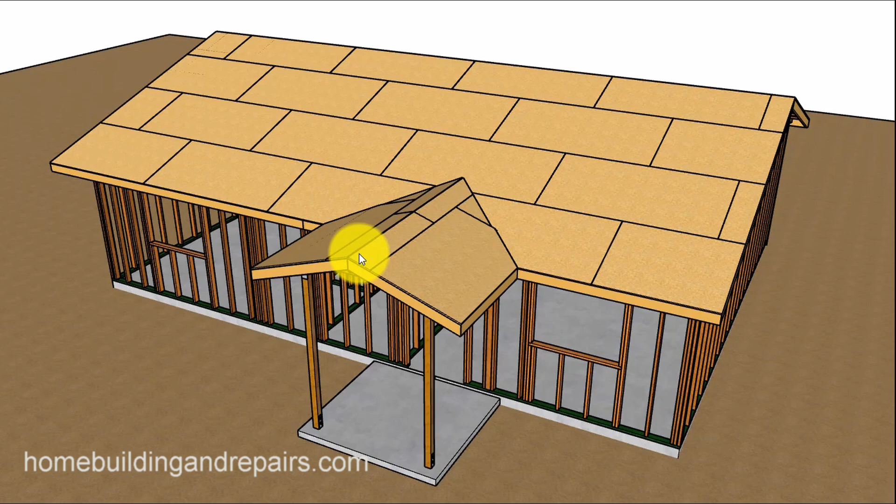Here is another video that might be helpful for anyone who's planning on building a porch extension like this and would like it to match up to the existing fascia board. And of course, that's going to depend upon how large your rafters are, where you position everything. So pay attention here if you're going to build something like this, because the rafter size is what's going to help you create the same dimensions.

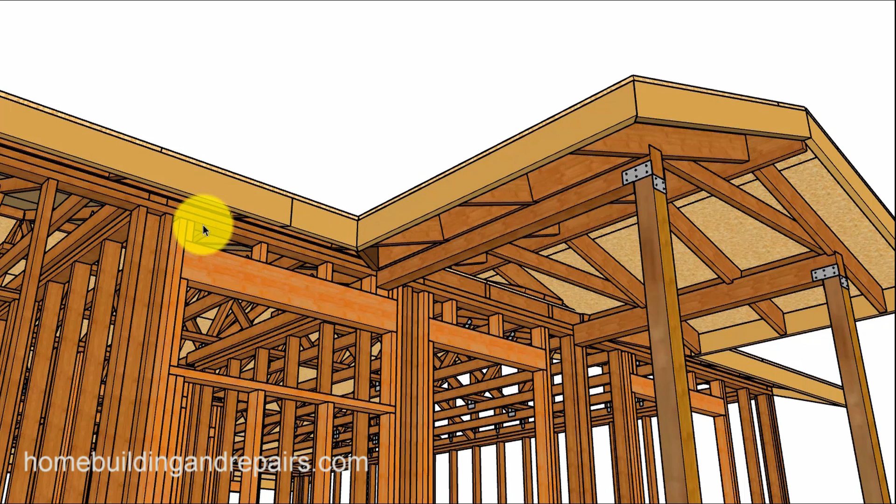For example, if you have a 2-foot overhang on the outside and you would like to have a 2-foot overhang on this side, then the rafters are going to need to be the same height. And you'll see what I'm talking about here in a few seconds. Go ahead and take the sheathing off, roof rafters.

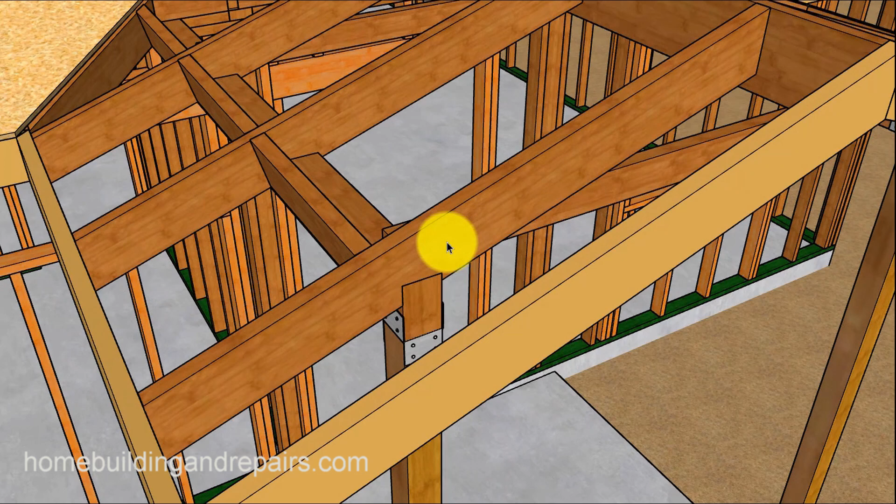So here we go. Here's the key here. The measurement right here from the outside corner of the beam straight up. Let's just say it's 4.5 inches. It needs to be exactly the same as what the outside of the roof rafters are measuring. And in our case here, we have a truss roof. So the measurement from here to here needs to be the same.

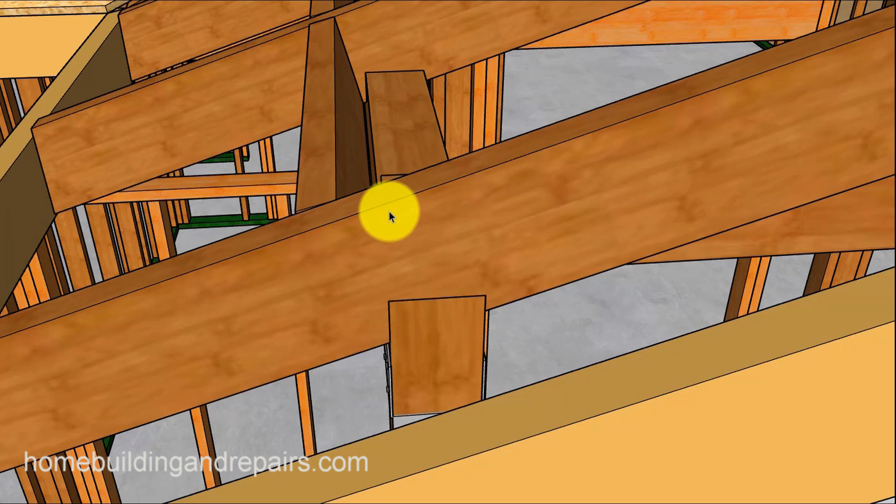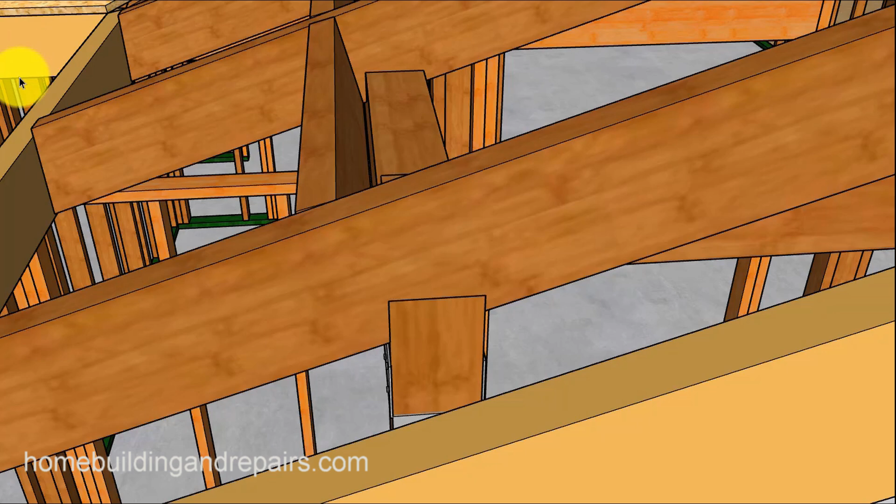Let's just go back to it. As here we are on the outside, as from here to here, to match the fascia board. Now, if this is a little higher or a little lower, then your overhang is going to be a little smaller or a little longer. So if the existing house has a 2-foot overhang and you want to keep it the same, then this measurement right here is going to be critical, going to have to be the same. It can be off a little bit, maybe even 1/8 of an inch, but other than that, it can start to push the fascia board out or in, depending upon how far off you are.

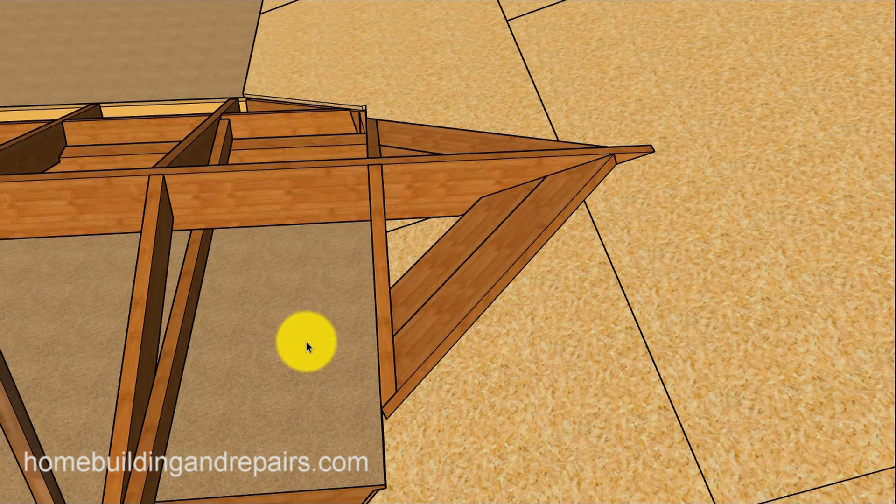Now, here's something else I want to point out. The other porch that I drew, when you finish the wall, it could be finished a little different. This one here, I went ahead and removed the overhang, and this comes underneath. And we need to have some type of a wall that's even with the lower wall here, and these roof rafters will provide us with that, as long as we line up the face or the edge of the rafter with the wall framing, because we might want to finish the top.

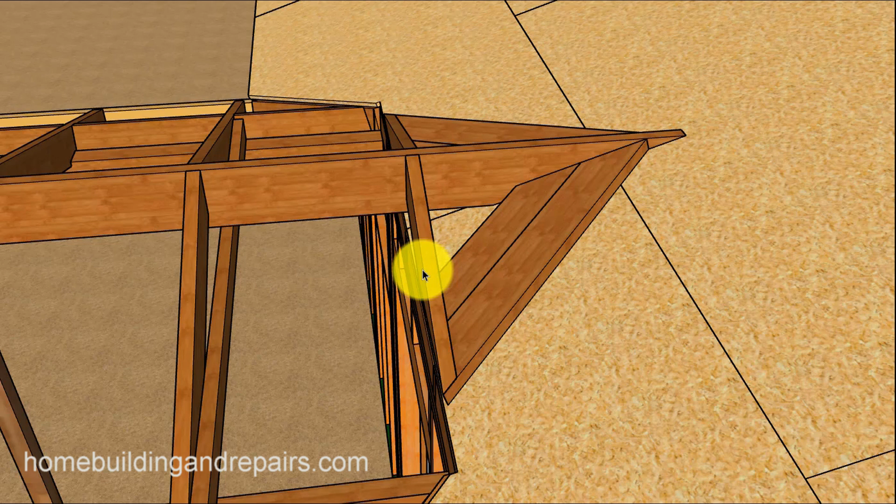It depends. If you're going to put a ceiling on, this isn't going to be important. If you're going to paint the bottom of the roof rafters, maybe you're going to use plywood for your sheathing, maybe some 1x6 shiplap or T&G, something like that, and you need to finish the edge, then it's going to have to be framed like this.

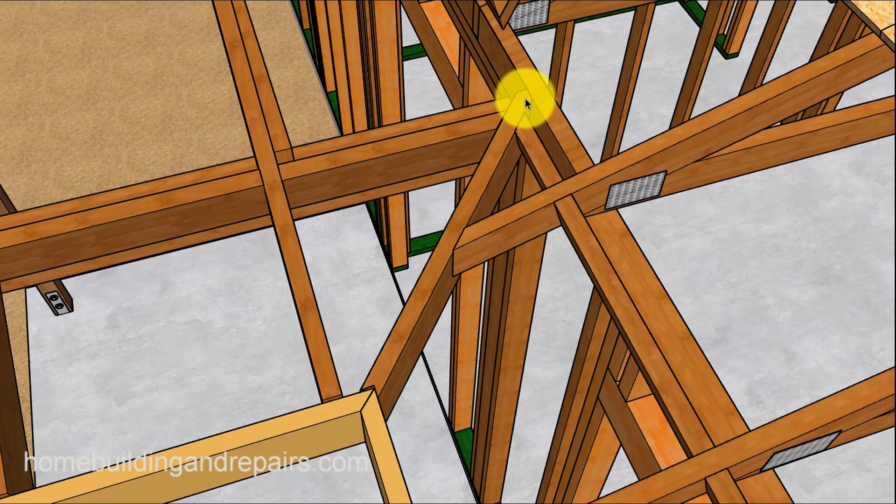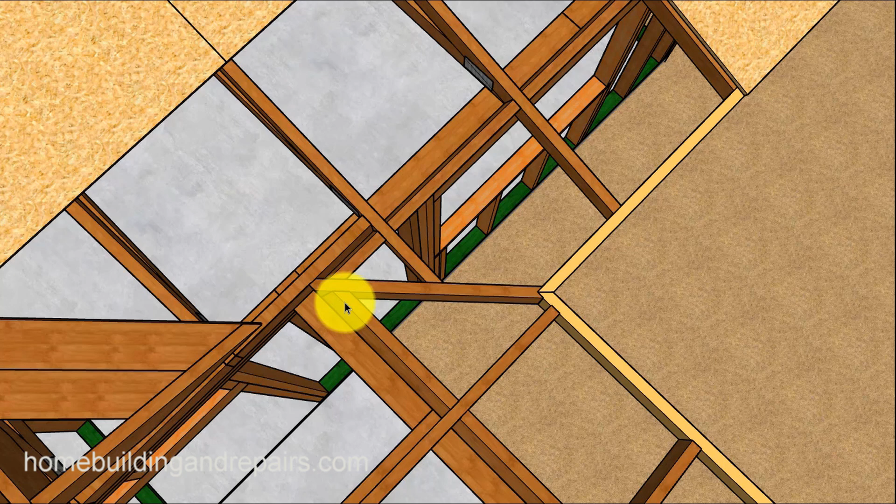Let's go ahead and take some of the plywood or the OSB away there, give you an idea of how the valley rafter here is going to connect, and you might have to cut the existing roof framing like we did here, and then install some blocks so that everything looks like it's part of the deal here. I used 2x6 here. You can always use 2x4. Just make sure that it's the right height. And the other end here.

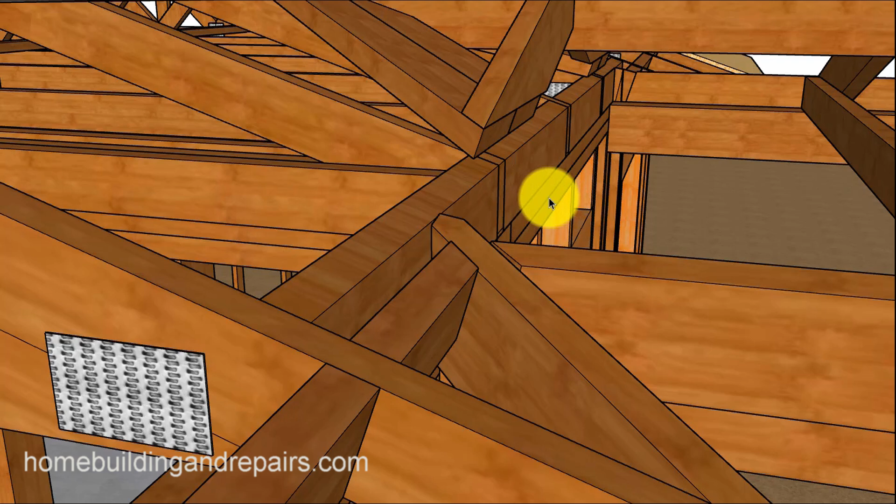Now, I did put some shaped blocks in here so that I could get the plywood nailing for the existing house. This is probably going to be a good idea. Toenail them into the framing plates. And of course, you can always use some building hardware. Some flat A35s or Teco clips would be fine. Put the sheathing back in. Of course, this would need to be nailed. Perimeter nailing, possibly 6 inches on center.

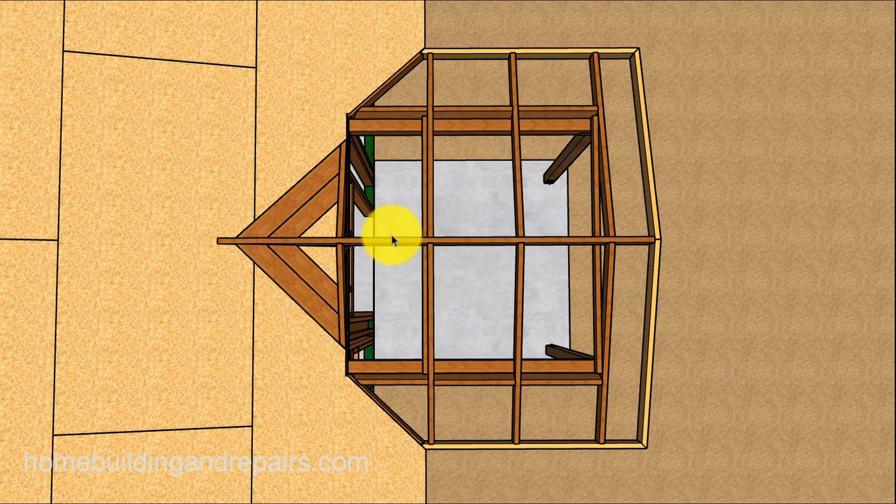A view from above, we got 2-foot on center rafters with a 1-foot overhang, 2-foot overhang here, and our valley fill. Our ridge, our rafter ties, and I don't have any collar ties in something like this. You can put them in, or you can always put a strap over it. Remember, a strap will do the same thing as a collar tie.

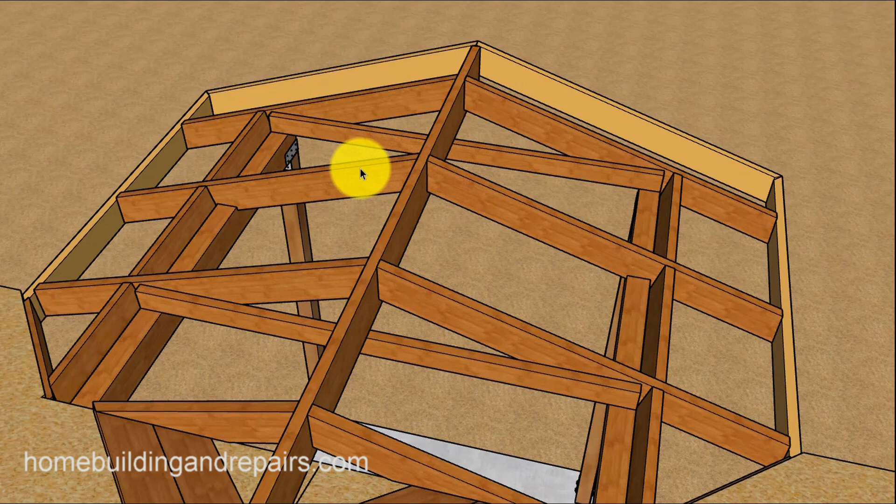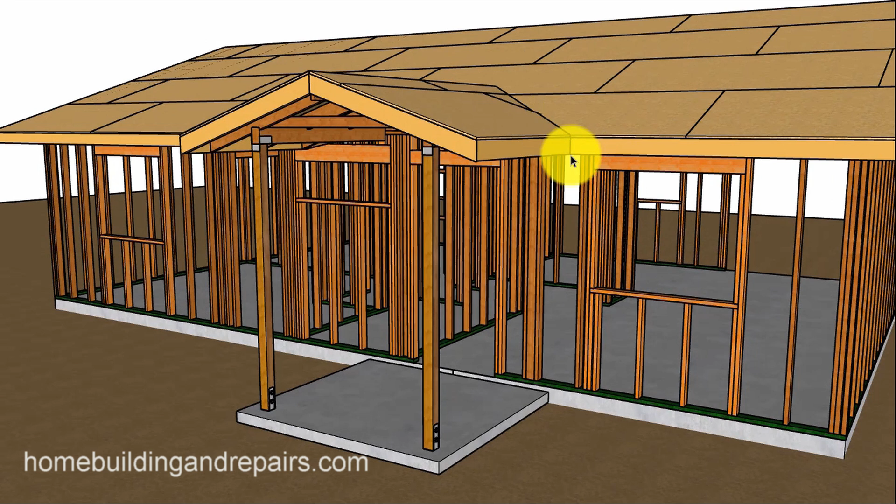What strap? I can't really provide you with that information. Because why? For those of you who have been watching my channel long enough, I don't like to give structural engineering information out that could get someone in trouble, especially me and you, if you don't really understand what I'm saying. Because I can provide people with structural engineering information. I just can't provide them with information that's going to work in every situation all around the world.

So that's it here. And hopefully this helped. I am not going to be providing you with step-by-step instructions on how to build something like this, but I do realize that a lot of people, all they need is a little bit of information to help them do the project.